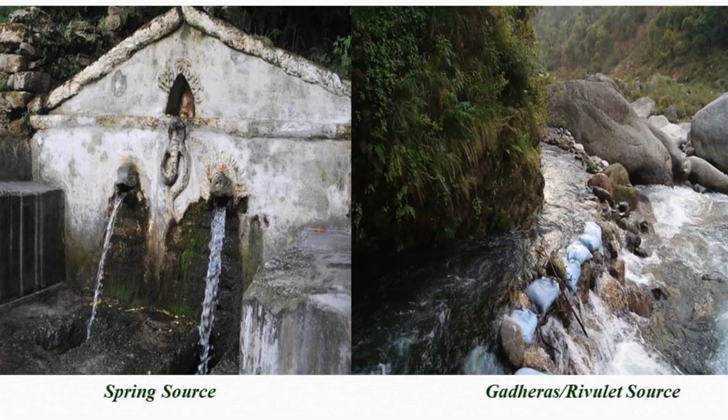Construction and maintenance of water supply schemes in rural areas is a difficult and challenging task. Normally, the sources which we tap in hills are spring sources and the small rivers called gadheras or rivulets. For tapping these sources, normally a structure called a boulder filled gallery is constructed for tapping a small river or gadhera source. Now the difficulties and the challenges are many. To overcome this problem, we have developed certain innovative technologies.

So in the case of a gadhera or a small river, a cross wall of stone masonry is constructed across the gadhera against the flow. This wall creates ponding in the upstream and a minimum discharge or practically no discharge in the downstream side. So a level difference of hydraulic gradient is developed in the upstream side, of the rank of 4 to 5 meters. Due to this hydraulic head, at the bottom of that cross wall, piping action starts developing and capillary actions take place.

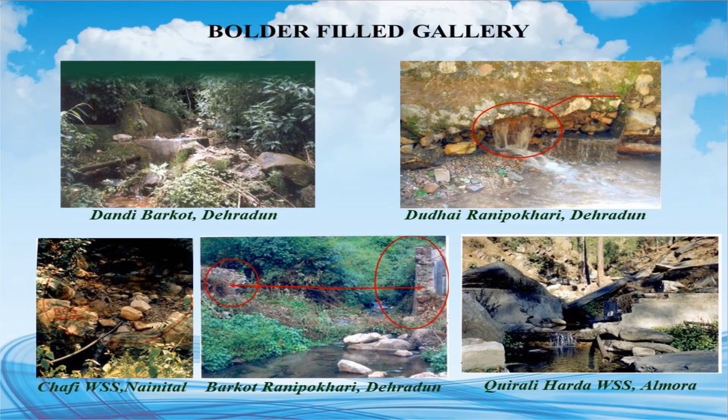As shown in the figure, due to this capillary action, water will start passing from the bottom, carrying some sand or clay particles with it, and thus that portion will become hollow and the foundation will become weak. The cross wall might bulge or might overturn because we have developed a hydraulic head of 5 meters in the upstream. So to overcome this problem, we have developed an innovative device called Uttaranchal Koop.

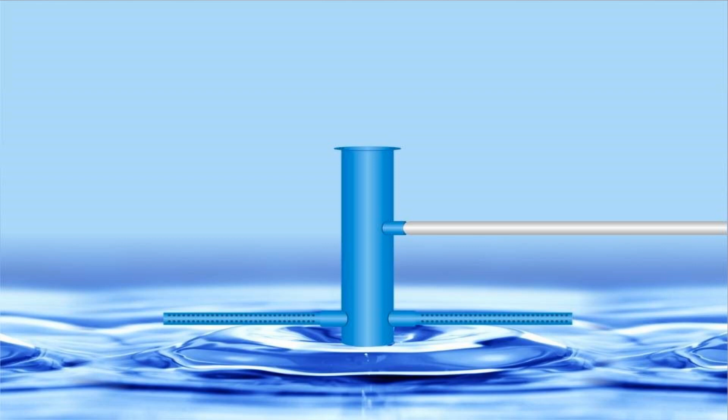This Uttaranchal Koop, as you can see in the picture, is a device made of MS pipe, a hollow cylindrical pipe, which has 4 radial pipes perforated at the bottom and is closed at the top. This hollow cylindrical pipe has an outlet socket welded at the center, and it is painted with anti-corrosive paint. It is a very light structure. It can be fabricated in a workshop in the city and transported by head load to the site of work.

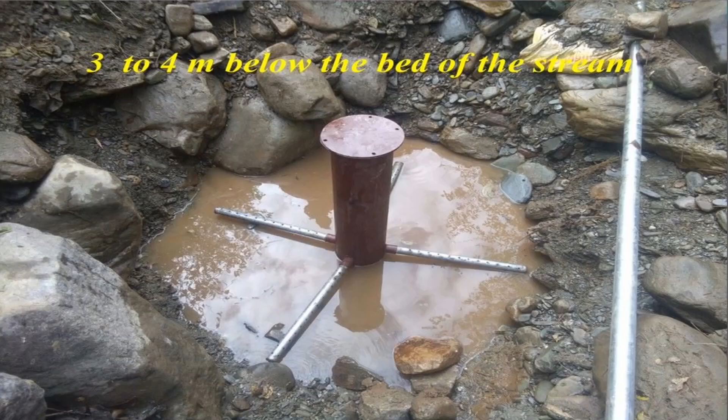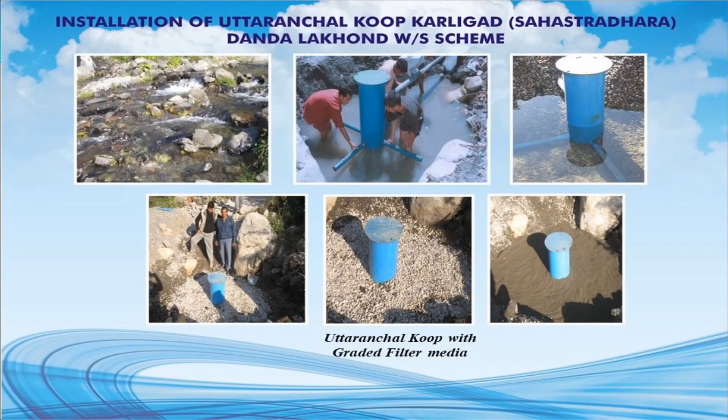So in a gadhera, if we dig 3 to 4 meters on the bank of that stream, we will definitely get water, because on the banks, due to meandering, there is a thick pile of sand, pebbles and even rock. Once we dig there, we get water. We drain that water and then, as you can see in the picture, we place this Uttaranchal Koop at the bottom at 3 to 4 meter depth. After placing it, you can either put the same dug earth material back, or use a graded filter media with pebbles, sand, charcoal, etc.

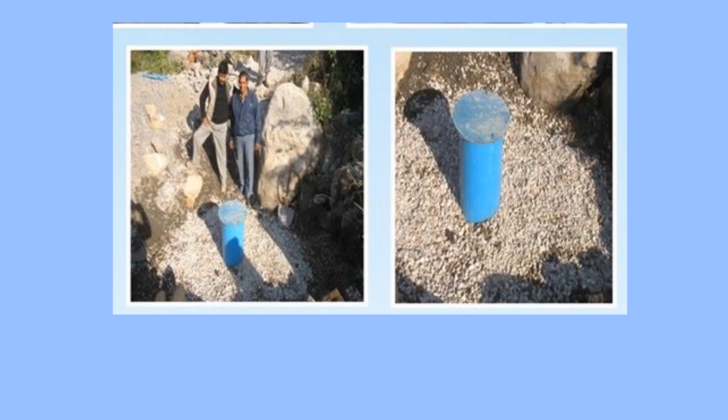This Uttaranchal Koop gets water only from the bottom, from the radial pipes. As you can see in the picture, water enters through the perforations in the radial pipes and starts filling the hollow cylindrical pipe. As soon as it reaches the middle point of the outlet socket, we connect that socket with the gravity main to the village or to the tank, and it starts flowing by gravity in the gravity main pipeline. In the process, the 4 meter earth or filter media acts as a complete filter, and water is filtered naturally. So this way we collect the water.

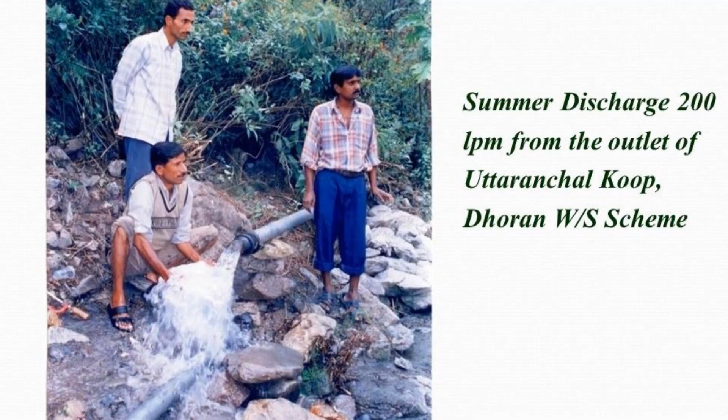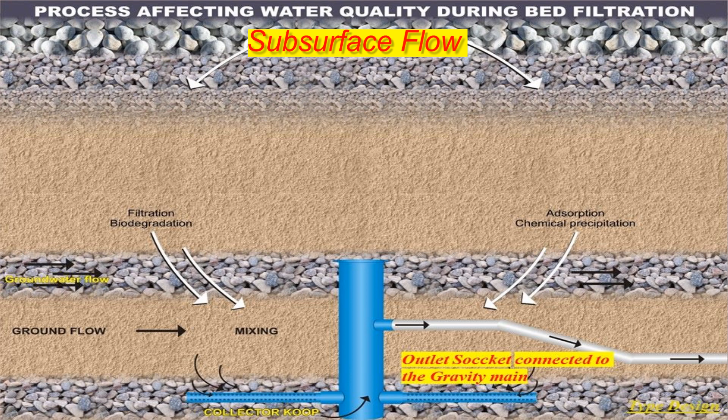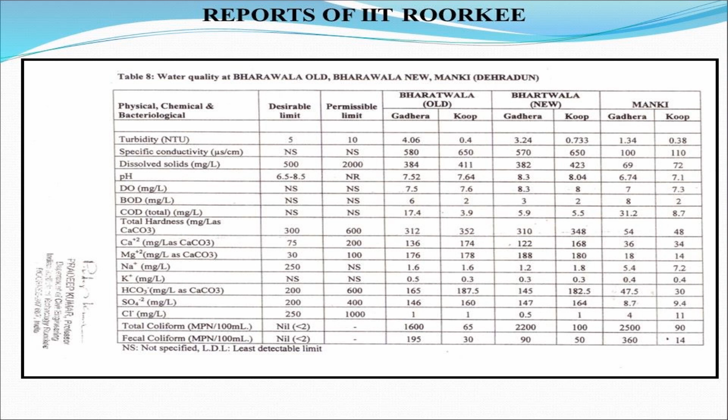Many reactions naturally take place in the river. There are 4 reactions: one is filtration, removal of turbidity, suspended particles, even bacteria. Then there is biodegradation; any biological matter that enters is biodegraded because of the oxygen present there. Then there are redox reactions and chemical precipitation. We gave this study to IIT Roorkee, and they found that 75 to 80% of fecal coliforms are reduced in this process, which is a great achievement.

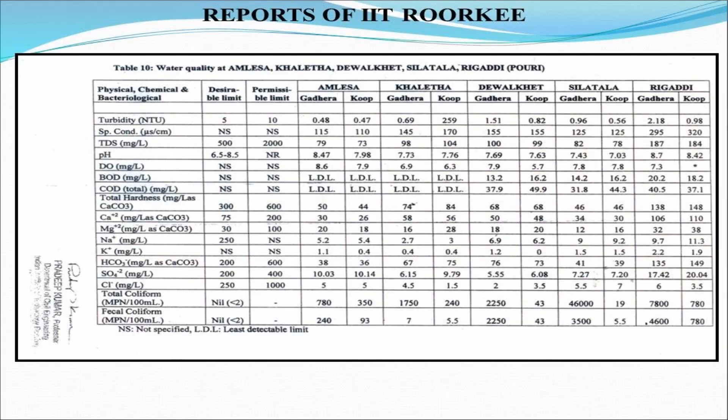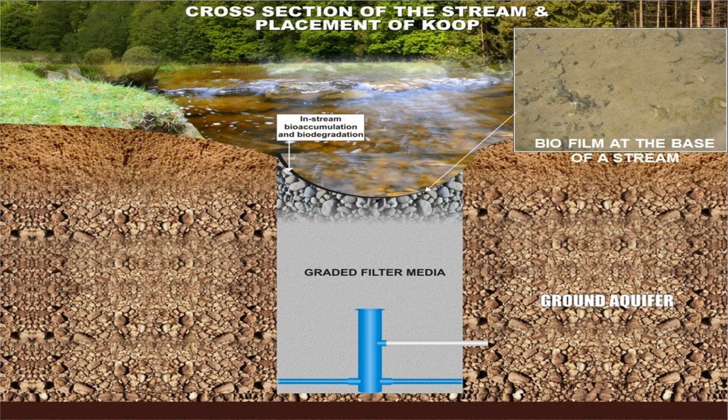The filter media not only acts as a natural filter, but a biological filter is created at the bottom of the stream, because the velocity at the bottom is 0 and at the top it is maximum. Particles settling at the bottom, including biological particles, decay and form a layer of biological filter. You can see a black layer in the picture. This filters out the bacteria, because they get sufficient food here and don't travel further down. So the water entering from the stream bed is bacteria free, chemical free and turbidity free.

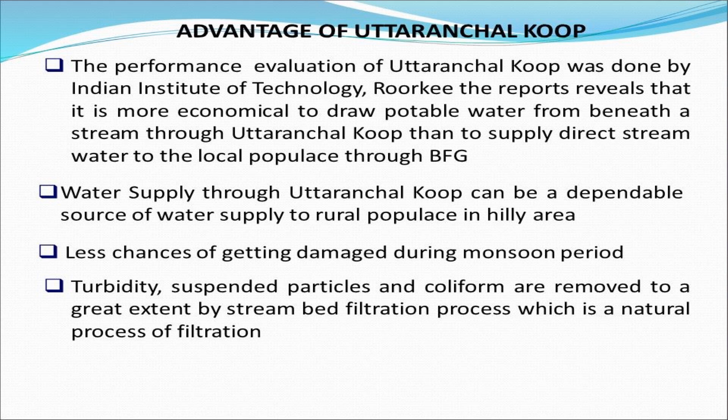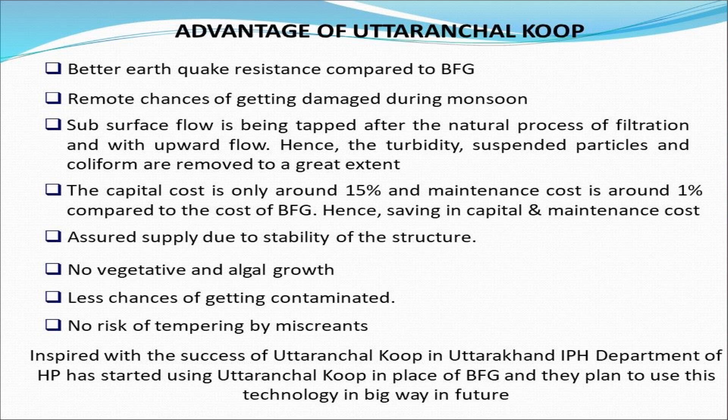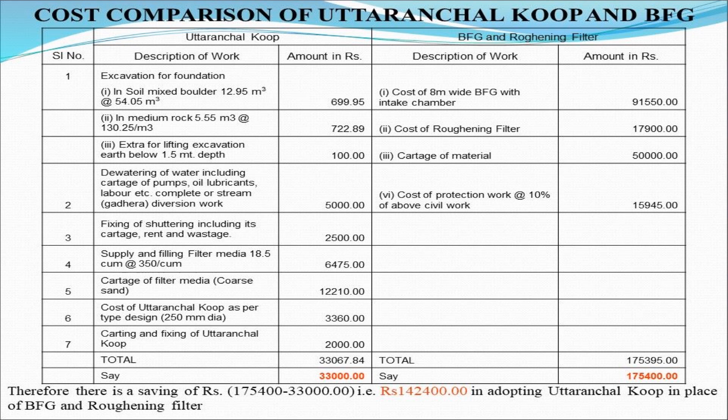And this device is calamity proof also, because there is no effect of earthquake, landslide, flash flood or any mischief by the residents. As per government policy, the Gram Sabha will maintain these water supply schemes, and they are neither technically nor financially equipped. So the cement structure should be replaced by this innovative device, the Uttaranchal Koop, which is very effective.